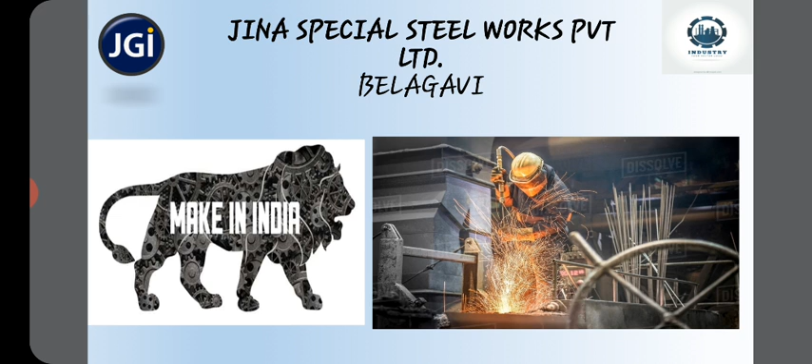Today I am here to give a seminar on an internship carried out at Jina Special Steelworks Private Limited, Belagavi. First, I thank our college and HOD sir for giving us an opportunity to carry out the internship. Our internal guide is Dr. Anil Shiratti, and the internship was carried out under the guidance of Mr. Birappa Katika, Human Resource Manager at Jina Special Steelworks Private Limited.

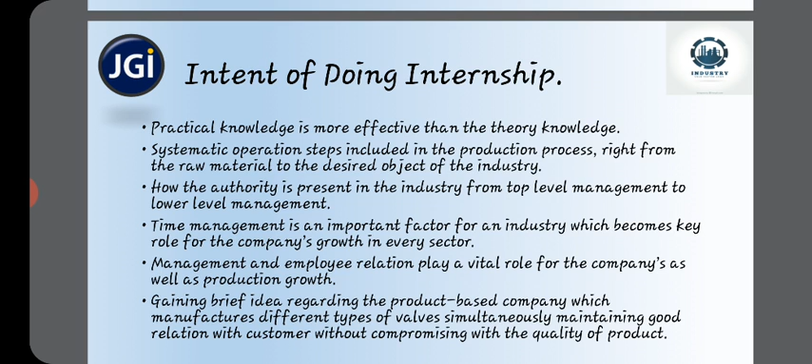Intent of doing the internship: practical knowledge is more effective than theory knowledge. This includes systematic operation steps in the production process, right from raw material to finished products, how authority is structured from top level to lower level management, and how management plays a very important role in the industry, with management and employee relations being vital to company and production growth.

Introduction: Jina Special Steelworks Private Limited is situated on a quadrilateral super express highway connecting commercial capitals. The unit was established in the year 1997, and on 18 July 2006 it was registered as Jina Special Steelworks Private Limited.

Jina Special Private Limited is one of the reputed and well-known manufacturers of industrial wires. We have experience of 4 decades in steel technology and have established our reputed position in the market. We are engaged in manufacturing high carbon steel into square, trapezoid, flat, and rectangle sections. The full range of industrial wires we manufacture is used for engineer files, spring washers, snap rings, etc.

The managing director, Mr. Gopal D. Jinagouda, is a mechanical engineer with 40 years of varied experience in steel technology. The company is equipped with state of the art machinery and a dedicated team of engineers focused on ethics and quality.

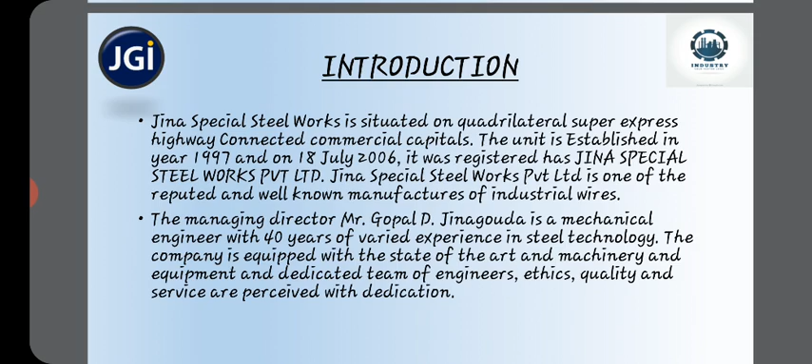Production facilities at Jina Special Steelworks Private Limited include atmospheric controlled spheroidized annealing furnaces, a highly pure nitrogen generating plant of 36 cubic meter per hour capacity, wire drawing bull blocks with total capacity of 1000 tons, 4 block multi-drum imported wire drawing machines, 4 roller Turk head cold rolling machines for profile sections, long bar centerless grinding machines, long bar MP equipment, and pickling, phosphating, and neutralizing tanks.

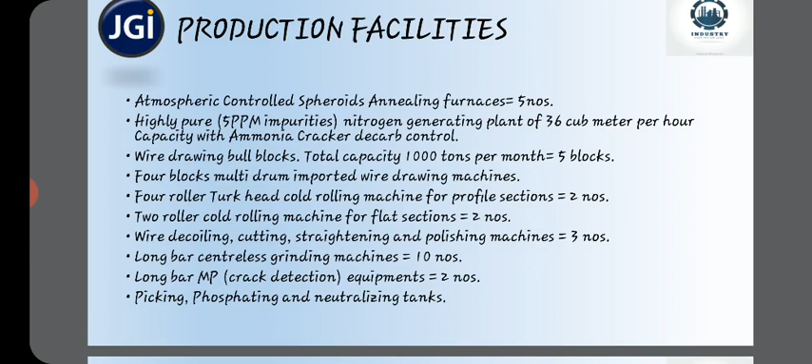They manufacture many products, but we were taught about three in particular. The first is cold heading wires. We manufacture and supply cold heading quality wire in coil form, and we are able to guarantee defect-free and high quality drawn wire products.

They have modern annealing furnaces as defect-prevention facilities, and we operate as a company catering to various demands of our customers. CHQ low carbon steel wires are extensively used for manufacturing fasteners, rivets, etc. We are a leading low carbon wire manufacturer and supplier.

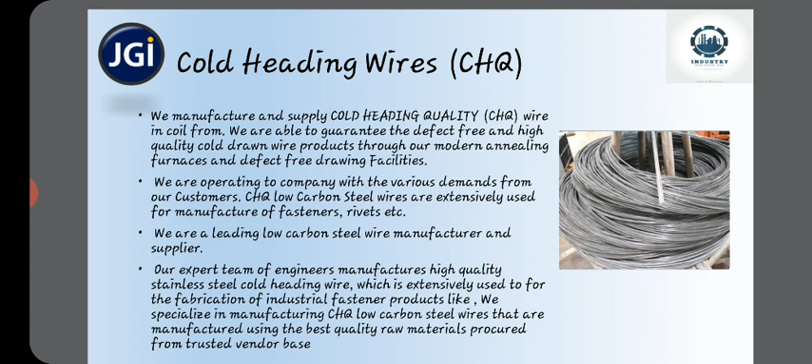Our expert team of engineers manufactures high quality stainless steel cold heading wire, extensively used for fabricating industrial fastener products. We specialize in manufacturing CHQ carbon steels, with the best quality raw materials sourced from trusted industry vendors.

The second product is bearing quality wires. We manufacture and supply ball and taper roller bearing quality wire with excellent spheroidization and least standard decarburization, using state of the art pure nitrogen. These high quality standards are met by our team of professionals using excellent quality wire rods from reliable sources.

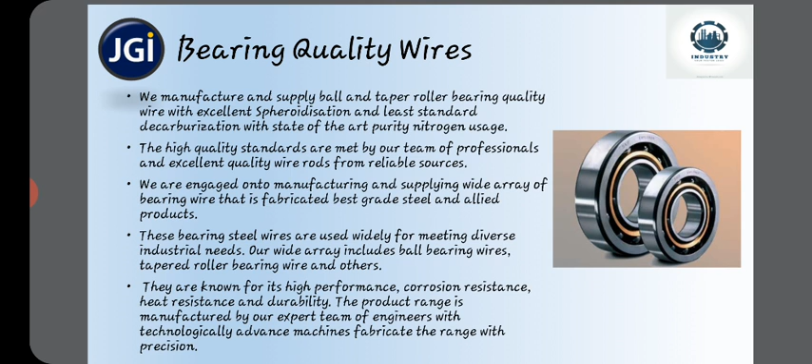We are engaged in manufacturing and supplying a wide array of bearing wire fabricated from best grade steel and allied products. These bearing steel wires are widely used for meeting diverse industrial needs, and our array includes ball bearing, tapered roller bearing, and others.

The third product is centerless ground bars. We manufacture and supply alloy steel centerless bars with zero defects, having close tolerance in sizes from 3.00 mm to 22 mm diameter, manufactured from highly accurate and precision centerless grinding machines. We are a leading ground bar supplier finding application in a variety of sectors.

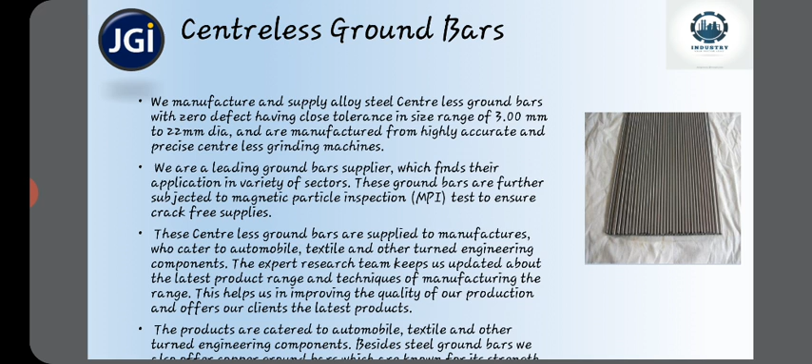These ground bars are further subjected to magnetic particle inspection tests to ensure they are crack-free. These centerless ground bars are supplied to manufacturers catering to automobile, textile, and other turned engineering components. Our expert research team keeps updating the latest product range and manufacturing techniques, which helps us improve the quality of our production and offerings.

Lab equipment: metallurgical microscope, metallurgical microscope with CCD camera at 1000x magnification, multi-channel computerized time versus temperature graphical printouts of annealing cycles, carbon and chromium analyzers, Rockwell hardness tester, FIE make universal testing machine, and oxygen content measuring instrument for ppm in nitrogen gas.

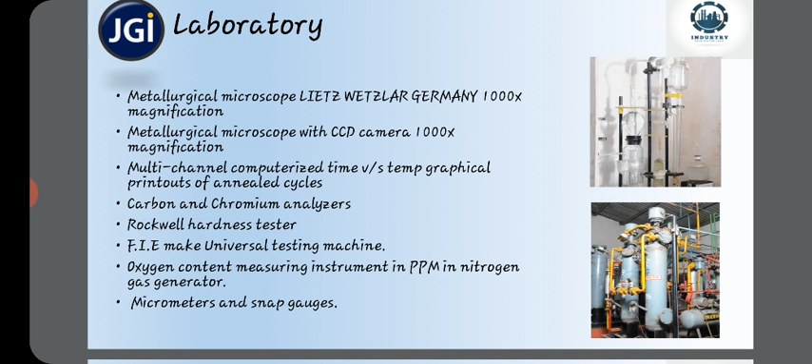This plays a very important role in Jina Special Steelworks. And next are micrometers and snap gauges.

Before going to manufacturing, I want to talk about the machines used in Jina Special Steelworks: bull blocks drawing machine, centralized grinding machine, highly precision cold drawing machine, Turk head for snapped wire and bars, lathe decoiling machine, and polishing machine.

Cutting and pressing machine. The material used in Jina Special Steelworks has its raw material source approved by our customers as well as the company.

About marketing, the products of Jina Special Steelworks Private Limited are exported to Europe constantly for 15 years, also supplied to Maruti Suzuki, and also to domestic companies.

The operations carried out in the manufacturing process are drilling, facing, turning, sinking, pickling, polishing, grinding, and heat treatment. For production of a product, the manufacturing process has a minimum of 9 steps.

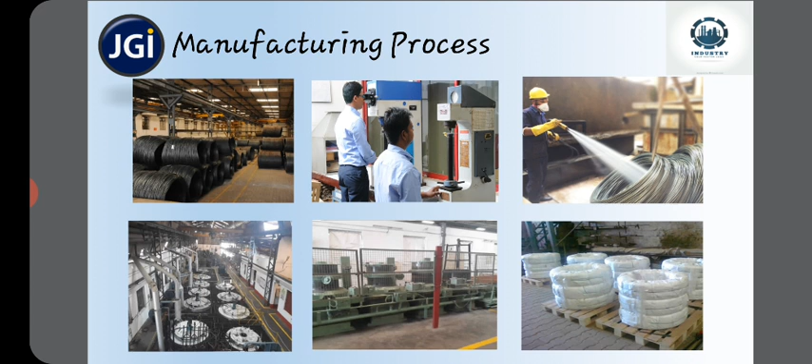Inspection is carried out as process inspection to control diameter, dimension, quality, and surface defects. Cold rolling is done through Turk heads into various shaped wires as per customer requirements. Ninth is spooling, packing, and weighing.

Suggestions to the company: communicate clear goals and expectations to employees, share information and don't leave things unfinished, encourage company communication, since delayed communication can damage engagement, and actively promote organizational effectiveness, reputation, values, and ethics.

Conclusion: the overall experience at Jina Special Steel Works, Honaga, Belgaum was a good one. I thank all the officials and employees for their cooperation throughout my internship, for being generous enough to take time from their busy schedule to explain various machines and provide a platform.

The techniques and technologies acquired gave us exposure to advanced processes involved in manufacturing. Evaluation of the finished products helped us understand the prominent part each process contributes. I'm thankful for their patience, continuous support, and guidance.

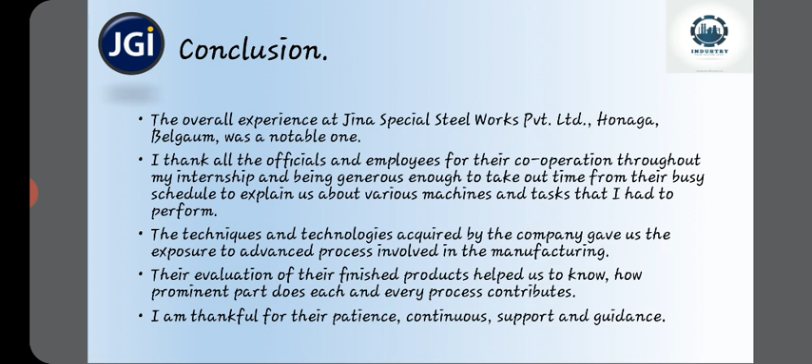Specific outcomes: learning the optimum use of resources, organizing and analyzing data records, developing working knowledge of various job processes, and building good working relationships in a productive environment. Thank you, sir.